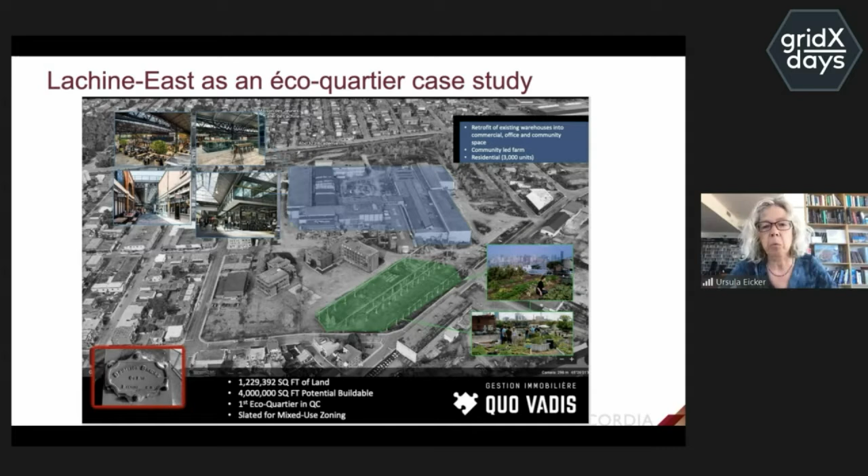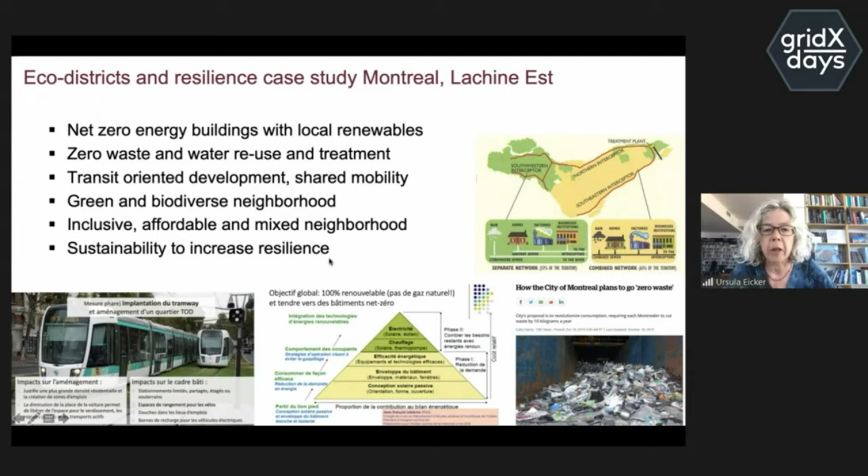When we work on district case studies, and there's a lot of old industrial settings here in Montreal that get redone, we talk on the building sector, basically the full spectrum of problems: how to create net zero buildings, integrate local renewables. Montreal has very ambitious zero waste concepts, but we are very far off it. And then there's this whole mobility topic, biodiversity, and inclusion. So lots of topics you need to tackle if we talk about such a district development, and there are many players involved.

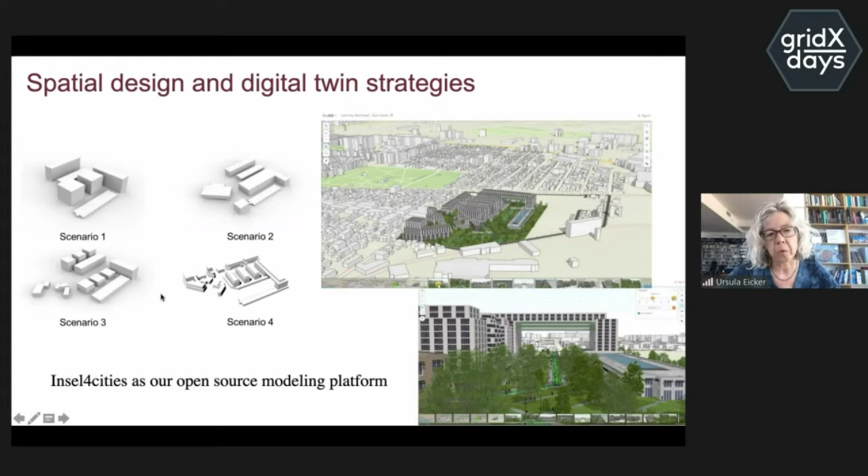So what we do as a university partner in these projects is come up with digital twin strategies. My whole team of 50 graduate students works on developing tools to model these transformation scenarios, and also provide operational strategies. We developed an open source modeling platform called Insel for Cities, and the first step is always to come up with geometry scenarios to model a district densification or new development.

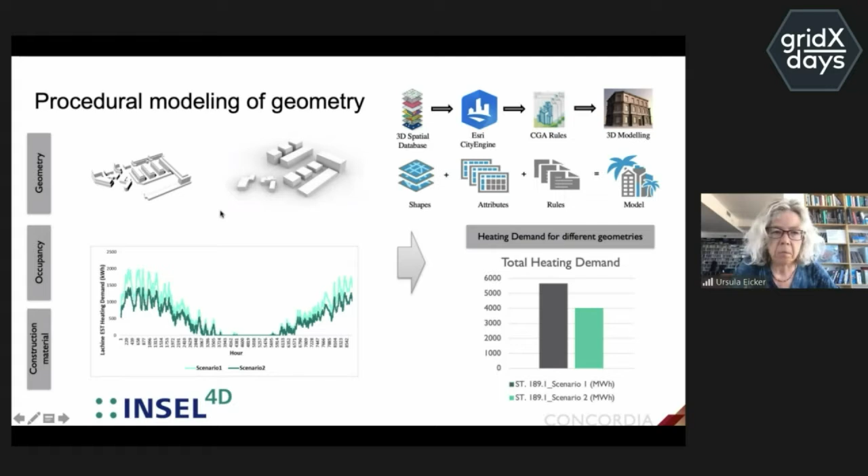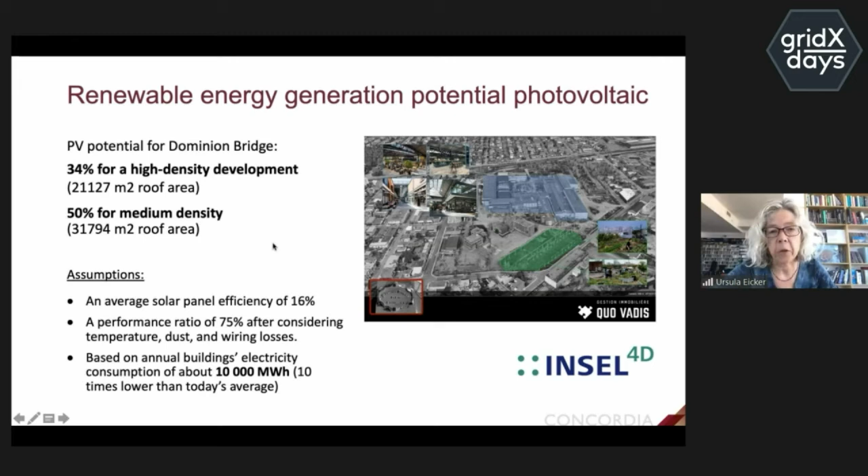Once we've got a few geometry scenarios, we have a full workflow to calculate heating and cooling demand of every individual building, then run different scenarios for window-to-wall ratios, insulation standards, and so on, as well as renewable integration into such districts. So we model the photovoltaic potential, for example, and depending on density, you can cover 100% if it's a low-rise development, but here we focus on medium to high density developments, where the local renewable fraction goes down to maybe 30 to 50%.

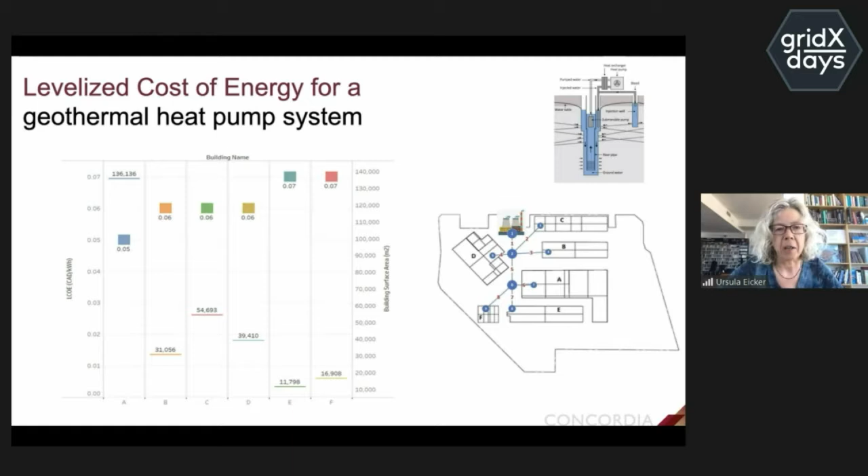And then we look at the energy systems, including comparisons of central versus more decentral solutions in the building complexes, including the distribution network modeling. So here we recommended geothermal heat pumps for the system. I don't have time to go into detail, this is just a very short overview.

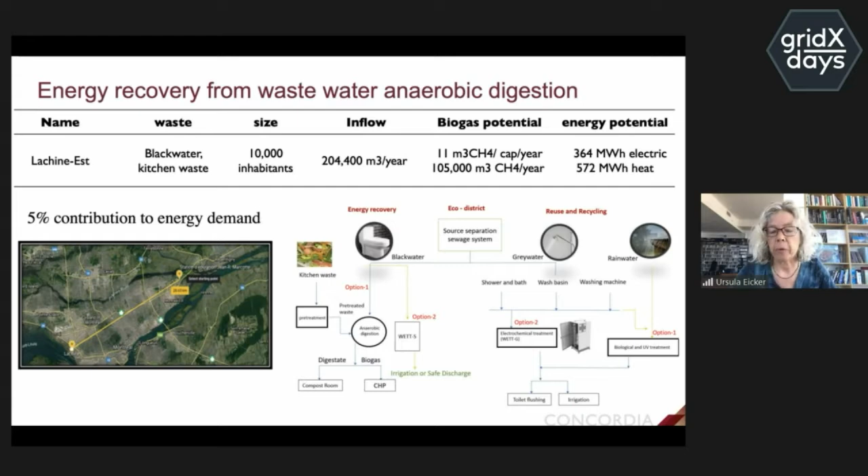Then we look at the other contributions from waste, which should be reduced, or wastewater, which is always there. If you look at the district in the southwest of Montreal, there's only one central wastewater treatment plant, located on the other end of the island, meaning actually pumping the whole sewage waste 30 kilometers. So in that case, we're looking for local wastewater to energy solutions using anaerobic digestion, which could contribute another 5% to the demand of that district.

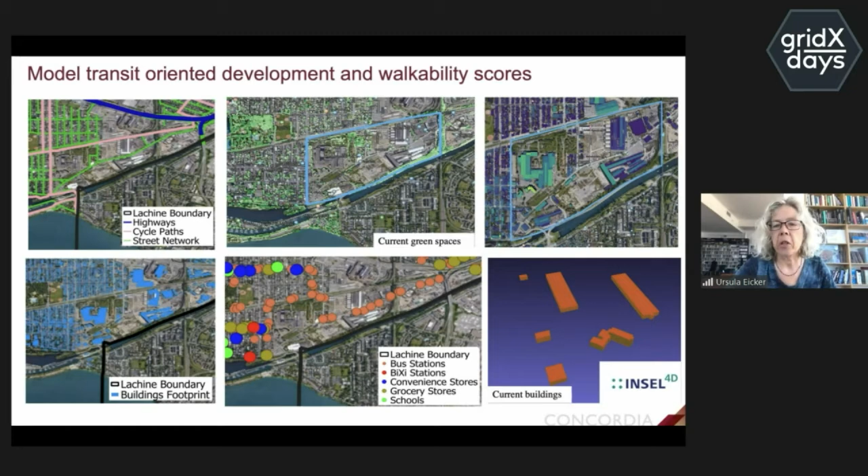So on the whole, this platform approach, we try to model the integrated concept of energy, transportation, and waste.

If I summarize quickly the main lessons learned from this analysis: of course, if you build compact geometries, you can bring demand down by up to 30% in that case. But insulation standards and building efficiency standards are the most influential factor that can triple heating or cooling demand. So it's much more important to get the building efficiency right, and the building codes here leave much to be desired, let's say. Then you can really achieve 10 times lower electricity demand, because we went for heat pump solutions, and we can cover half of that with solar photovoltaics to increase resilience.

At the same time, these high density developments improve walkability and access to public transit, and thus reduce transportation related emissions.

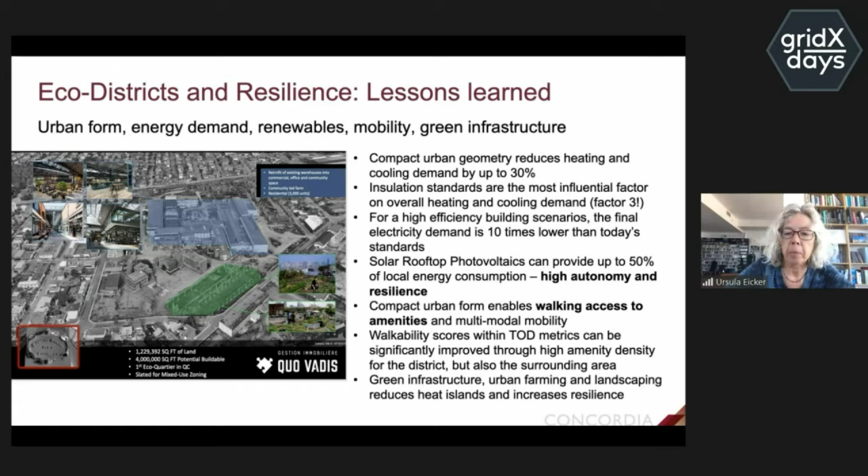Maybe to finish off, the lessons more on the regulation side. How do you make that happen? This is not municipal owned land, it's privately owned land, so there's a limit to what the city can really do. The main instrument that works for creating higher than legal standards is the zoning process.

If you want to get ecological standards going, the main instrument is basically giving developers more density, because that means they can create more profit, and then they can invest into higher building standards, affordable housing, and so on. So that's the main lesson learned from that particular case study: the process before the building starts is crucial to set these standards, if it's not municipally owned ground.

And then digital twins, I think, are a very interesting option to support this planning process. All right, that was a very short contribution from my side.

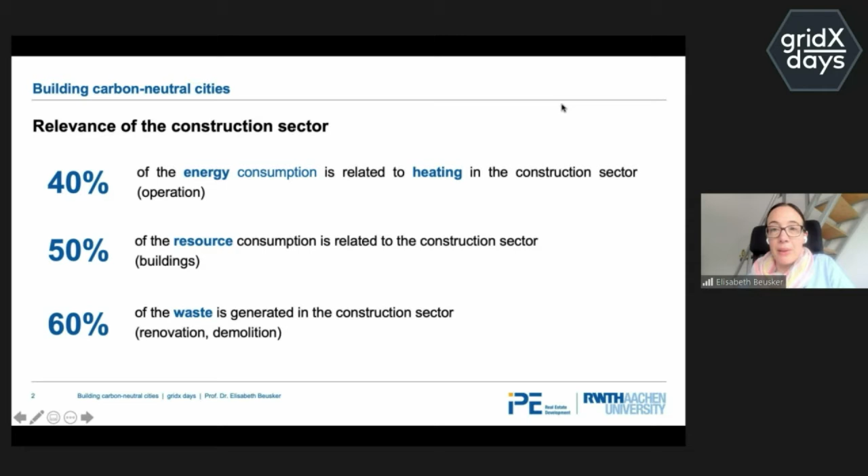What we have to keep in mind is that right now we are thinking a lot about new plannings and new developments regarding the next 5 or 10 years, and we have a big lie because we say, well, the planners in the future, they have to make a good planning and have to be responsible for the buildings which we build right now in a standardized way. And that's actually a big lie.

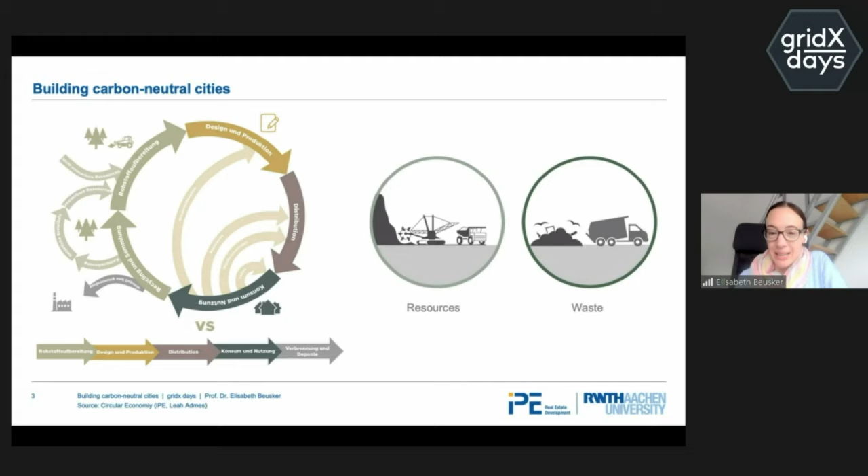We have to start now with better resource management and better thinking about how we deal with the waste we produce right now in the construction industry. Right now we are not doing it. We're just saying, okay, we make everything like we have done the last 20 years, and the planners in the future have to take care about the waste. That's not the way we should do it now.

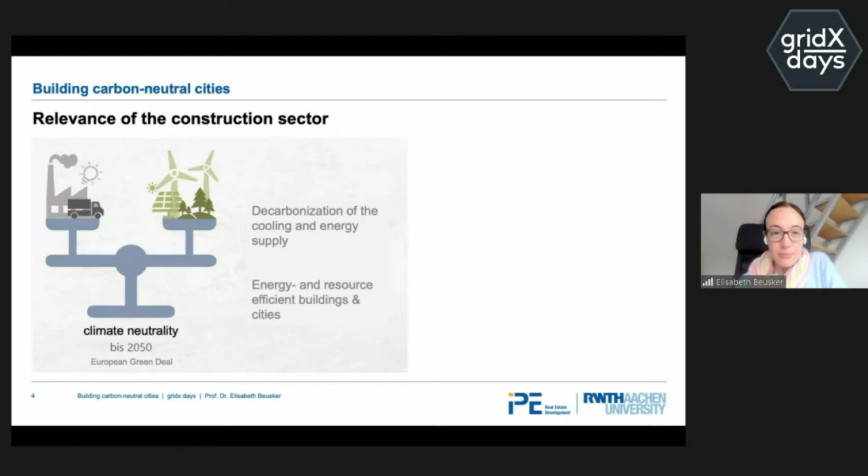So the European Green Deal gives us a big target for 2050. First is related to new technologies — we have to decarbonize the cooling and energy supply. I would say I'm not responsible for that part. But the second one is important: energy and resource efficient buildings and cities. This is something we have to have a better focus on, of course by integrating new technologies and new standards.

The first lie I have already mentioned — that the planners in the future have to make a better job than we are doing right now. And the second lie is that at the beginning of a real estate development project, when we think about the scope, the use, what the investor would like to have, we are always thinking in buildings, which is not the best way. We should think in space, and perhaps also in space which is already available. So I would say the first target for reduction of carbon emissions in the building sector is to always think about minimization of spaces and volumes.

So the question is, do we need the space? What are the best synergies we could create between different functions? Can we hire space temporarily? Something like that — that's just the first question. Then the second and third questions are about how we can build sustainable buildings and how we can develop sustainable urban districts and cities.

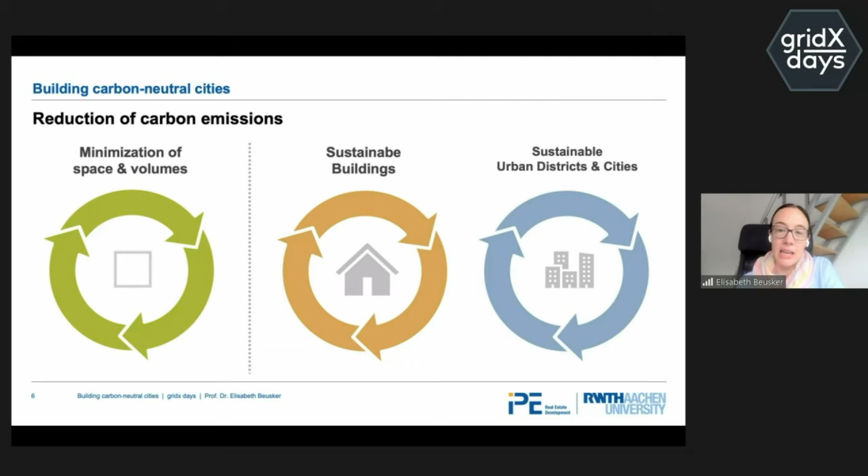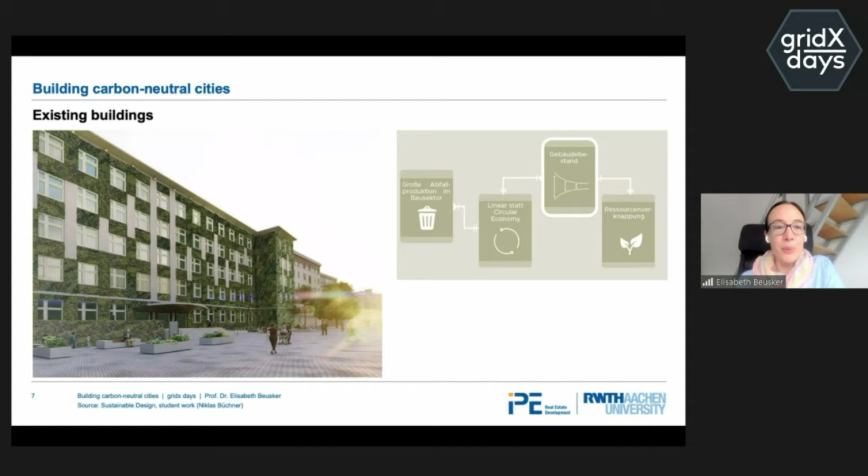Regarding the buildings, I just would like to mention that quite often we are thinking about new projects, and the standards and regulations, the funding regulations which we have for several buildings, are always related to new buildings. We have to change in future so that we get much more power and money to refurbish existing buildings, because this is a huge amount of our building stock.

Normally, in normal construction projects, we would take the top-down approach. We have an overview of the standards and regulations, how we have to build, what is allowed to build. We have our specific users for whom we build, and then we make specific building planning for a specific site. What we are doing in Living Labs is actually the other way around. So we say...

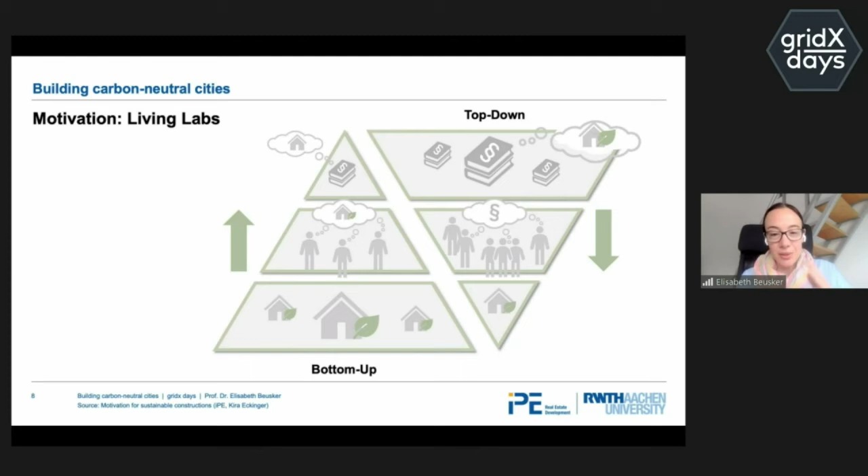We would like to change regulations and standards. We would do it with people. So we make a big participation part in the project, and we start with real projects, trying to change something in the building process.

This is the one Living Lab I would like to present today. It is called SmartQuart. It's running from 2020 to 2024, so around 5 years, and a lot of people, stakeholders and companies are included in this project. As a core target, we have 3 urban districts: a living area, an industrial area, and a very dense urban area.

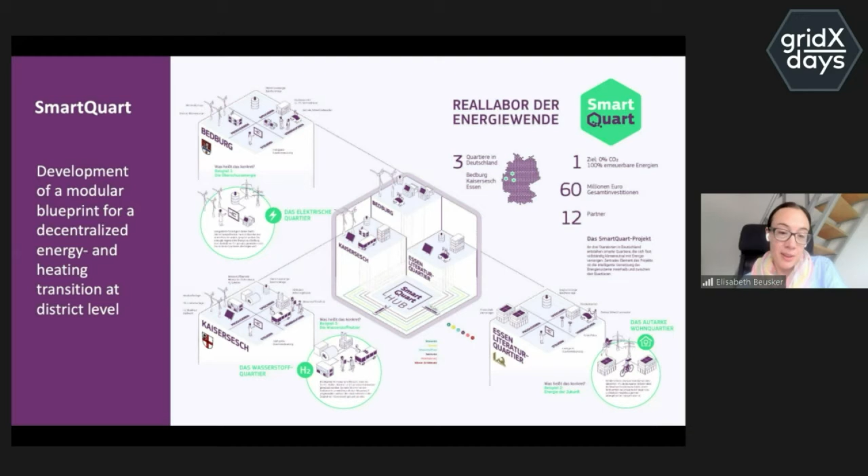We are implementing different technologies to reduce energy and to build them very resource efficient. This is our overall target. Right now we are developing and planning these 3 quarters, and at the end we would also like to measure the operation numbers and make a monitoring.

What's very interesting — I think Mrs. Eckinger has also mentioned it — is that in the Living Lab we can analyze the potentials on site, but on the other hand we can also evaluate the potentials for a possible rollout in Germany or further. So these are 2 methods we apply.

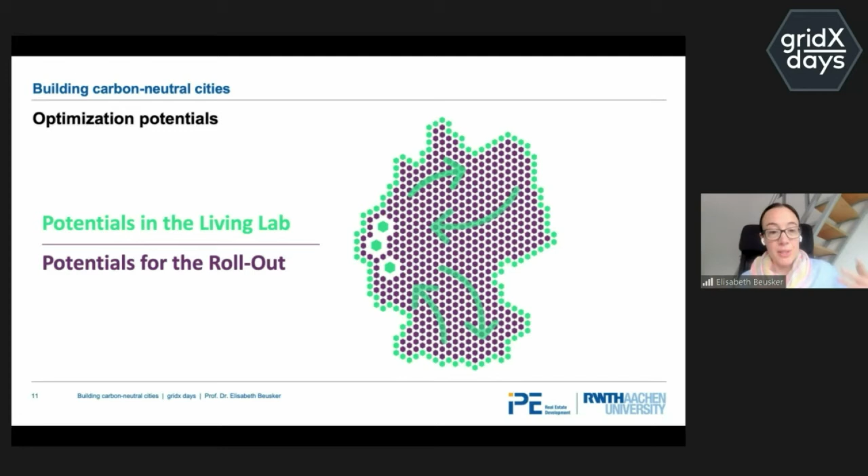First is to see how well we can achieve the targets we have set ourselves for the 3 quarters, for the 3 districts. And the second target is how we can make the outcome more effective, because let's say more regions are taken into account.

How we do it: we have defined 5 areas of intervention. So we make ecological analysis, social analysis, and economical analysis. What's very interesting is that there is not only one direction of impact. So if you have a specific social group, you have specific economic targets, and you can achieve specific ecological results.

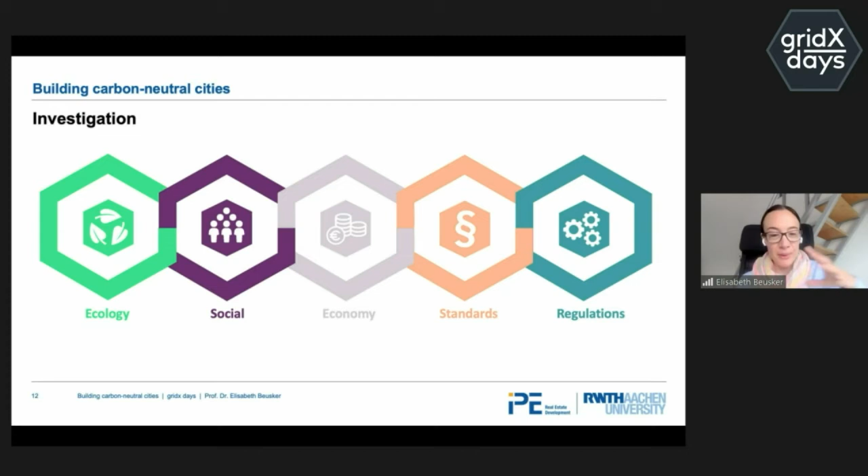There are different loops in that, and this is very interesting to see. What we also develop is checking if the standards we have are good for energy and resource efficient planning, and if we need more regulations or fundings to bring people to more ecological and economical plannings. So there are different correlations, and it's quite interesting to apply.

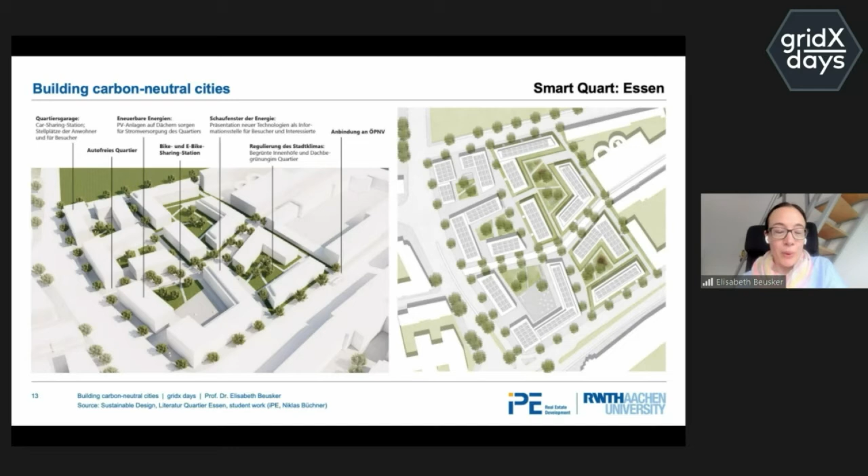This is now a view on the student work for one district, Essen, and we see that we have a lot of interventions in mind which we can imagine. It is linked to different districts, different functions, different energy movements between areas, and of course mobility and new ways of water consumption and energy consumption are taken into account.

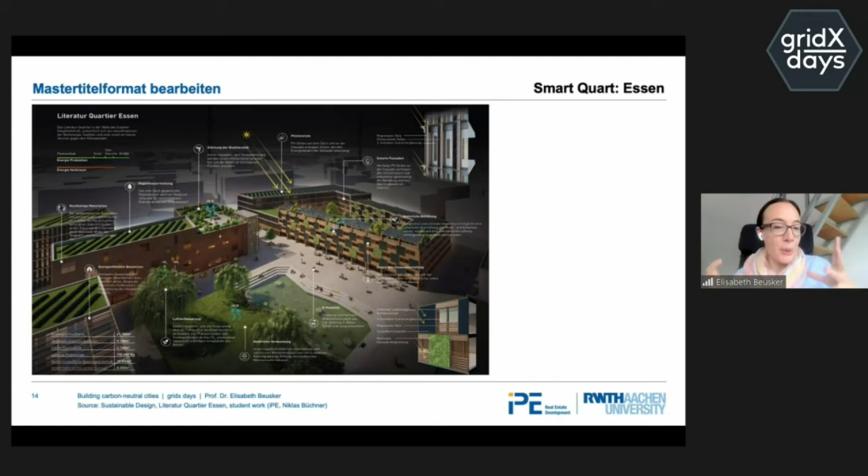The analysis is always carried out on district level and on building level. So what we see here, for example, is thinking about how rainwater can be used for different functions in the building. On the other side, we have to take care that we have a lot of green areas so that the water can be used.

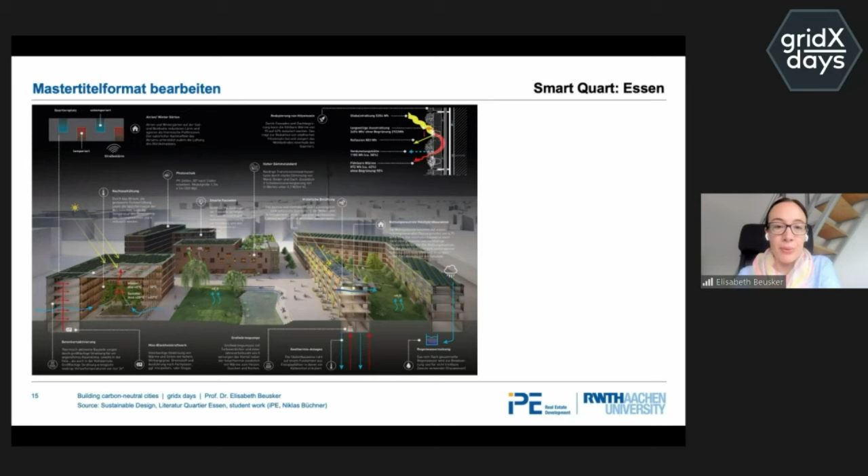This is just an example about a facade planning. So the building always interacts with the different sites, and we go into detail with the students, thinking about what would be the most appropriate way for a different function at a specific facade and orientation.

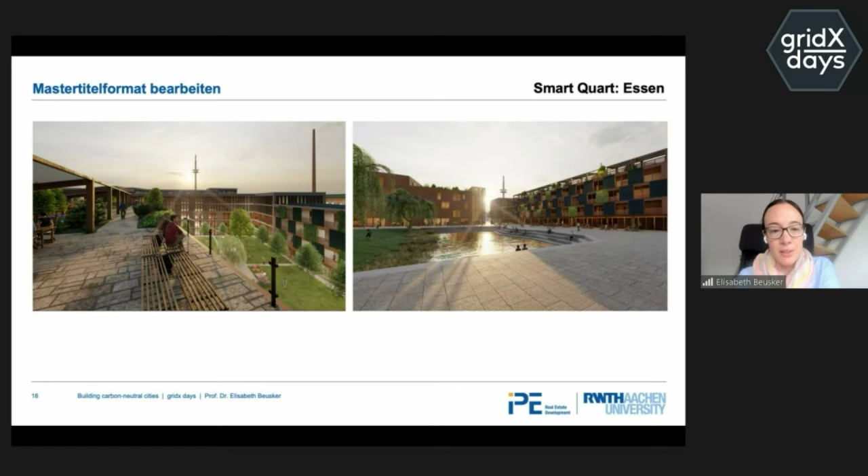To both of you: what are the major challenges of scaling a pilot project or microgrid to widespread real-life applications? Starting with you, Ursula.

Well, in the end, you need to convince quite a diverse set of stakeholders to build it, because it doesn't seem to happen by itself. I think it depends a lot on the governance structures and who is driving that change. Here in Canada, in the North American context, it's much more driven by private investors, which isn't easy because electricity is very cheap. So there are boundary conditions where I think change will only come for small local renewable integration if there's a strong will of a municipality or of citizen groups—more unusual stakeholders that drive the process. I think that's really key to get these projects going.

I would say the same at first instance, and I'd add that we have to get rid of the idea that we build it the way we have done in the last years. We have to be open to new ways of project groups and new ways of integrated planning with a lot of synergy, which we can only achieve with interdisciplinary project teams. The facilities management has to be taken into account at a very initial phase, and the users' demand has to be prioritized and taken into account—not thinking that a normal office building would solve all the problems we have.